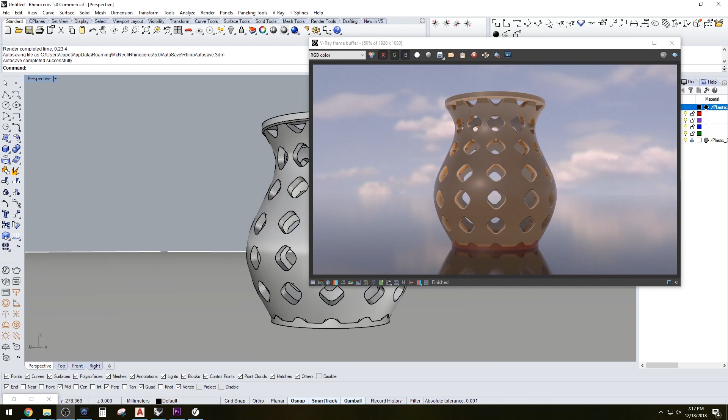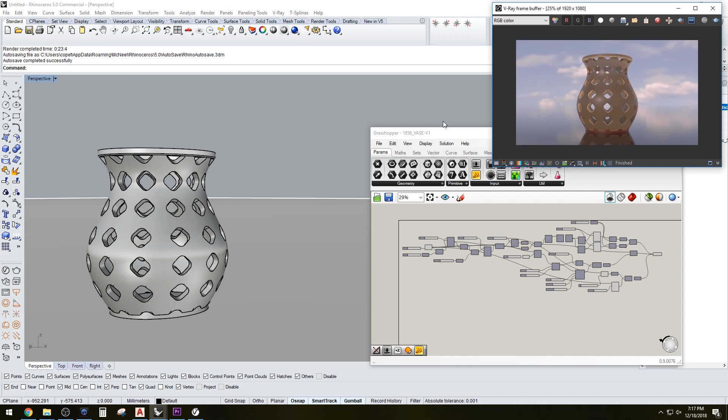Everyone, in this video I'll be going over the steps for creating a parametric vase form. I've been getting into 3D printing, so this is something I wanted to create to make some interesting shapes and then be able to produce them with the 3D printer. I'll be going over the process from the beginning initial design stage all the way down to the manufacturing and production of the design. Let me show you what it takes to get some of this done.

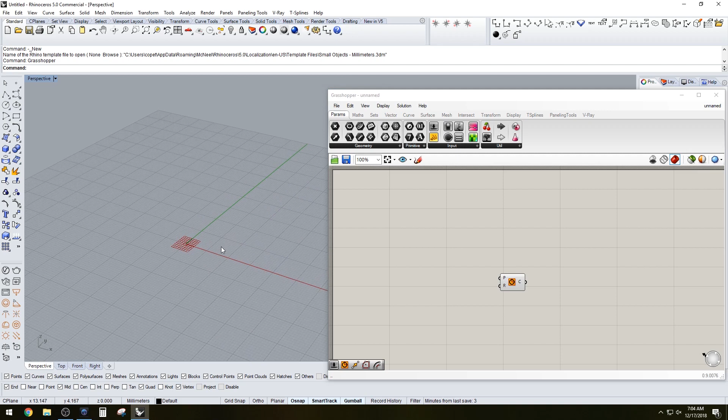To create this shape I was talking about, I'm going to open Grasshopper here and start with basic forms. I'm going to use a circle to create that shape, and I'm working in millimeters because that's the units that the 3D printer looks at. Let's go with a 50 millimeter radius here, and so we're creating the base geometry using a circle.

Now that we have the base circle, we want to create a form that kind of weaves in and out. So we're going to move this up. We have that initial shape, and we can move this up in the Z direction. We can go, let's say, another 50, the same amount, and so we have that shape and this shape.

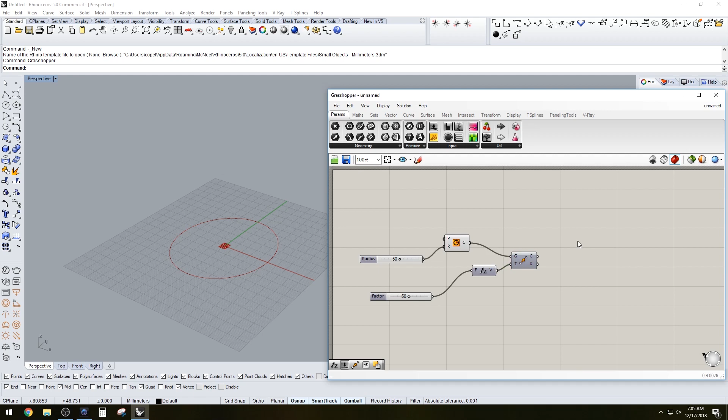Now I'm going to hide this shape because I want to offset that shape, out a certain amount, let's say 20, but I want it to offset out. The reason I do this is because I don't ever want the circle to go in, I only want it to go out. So I'll make it a max of let's say 30, so it'll only allow me to go out. That's what I want — that initial shape and the form that goes out.

Now we can move on and create another shape, which instead of creating separately, I'm going to take this circle and put a circle of the same size right above by mirroring this geometry and using this circle plane as the mirror plane. So we have that first, second, and third shape, which we could now loft together and create an interesting form.

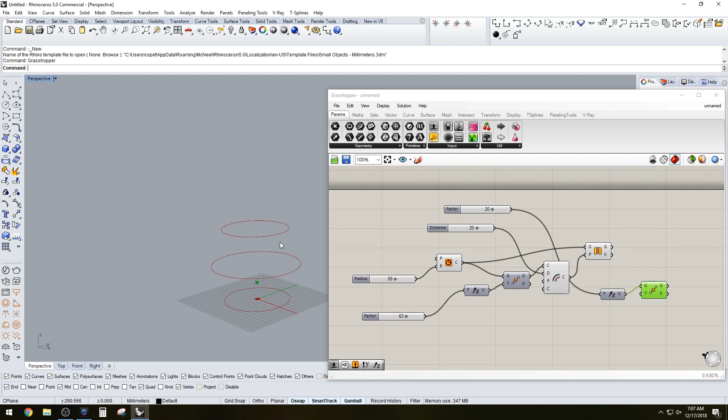But we want that top lip to be able to offset out also, so let me show you here. Let's offset this one, let's move that one up, move this shape up. So we can move that up a certain amount and then offset it out. We could also increase that height here, so we can go to 50 — we can increase or decrease, and then we can change that form.

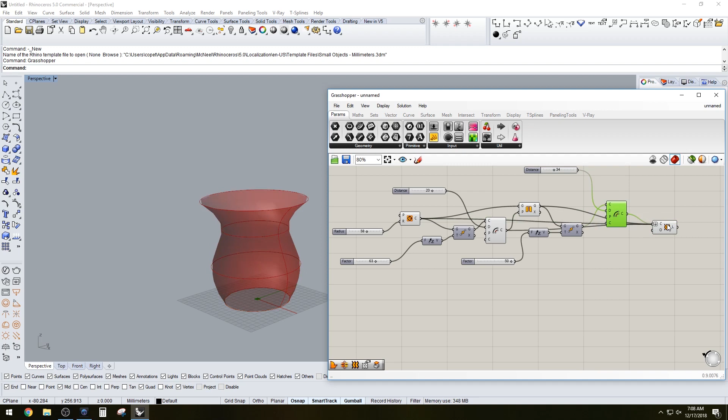We could easily loft this together, starting with the first one here, moving on to this one, flattening it. So that we have the initial form that we're going to use for creating the vase form. So there we have that. We can move this up and down and stretch the height there, and then also the offset of the middle.

Okay, so here we have the form. That's the final form, and we've created it by offsetting circles and using the circles as mirror planes. And so there we have the form.

Now what we want to do is create a solid offset for the surface, and we want to poke a bunch of holes through it so we can create an interesting form. So okay, let's get that done — offset it a certain amount, let's say 5 millimeters thick.

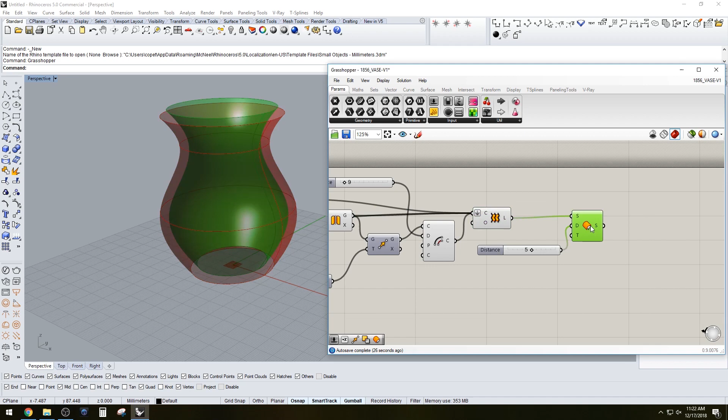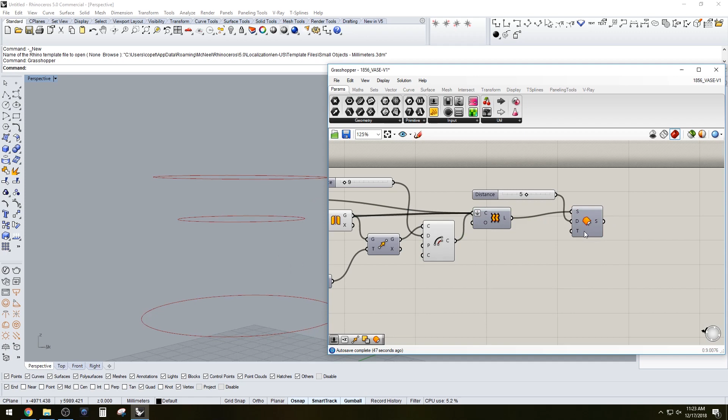So it starts offsetting to the inside. Now you could either try to offset in or offset out, either way. So we have that offset surface and we have that inner surface, and as you can see they are both — the one that is inside is off the ground, and then here it clips that one. So what we're going to do is hide both of these by unpreviewing them, and let's also hide all of this other initial stuff.

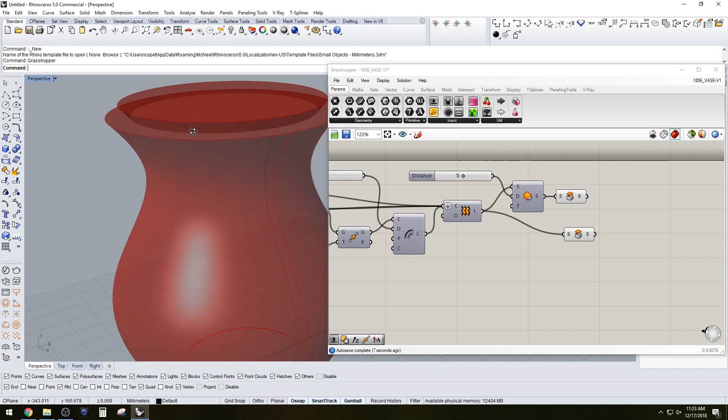And what we're going to do is cap them, both of them. So you go to cap holes, and you'll see here, when you do that, it creates the top and the bottom, and then you create that one into a solid. You have one inside of the other. Now let's go ahead and hide both of those, and we can see that this bottom one is the outside and the top one is the inside. So let's subtract.

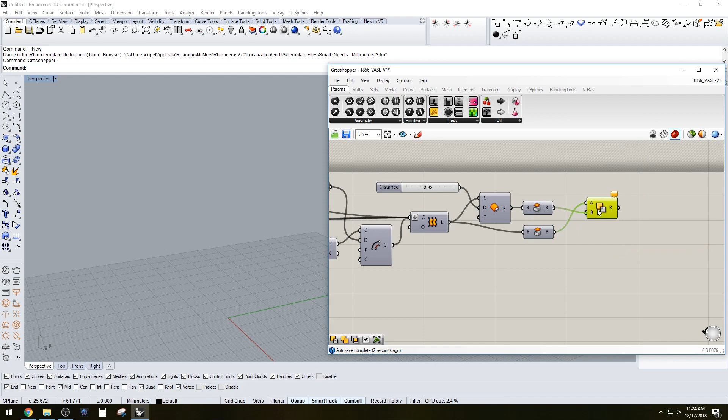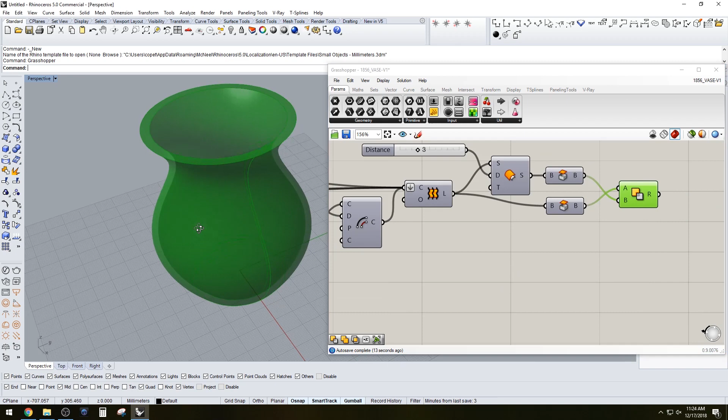So Boolean difference, which here is called subtract or solid subtraction, solid difference, and we know the bottom one is the outside one and this is going to be the inside one. And there we go, we have a vase, I guess, and that's the form we've successfully created, which we can straight 3D print right now because it's a solid. It has enough of an angle that it won't need supports. As you can see, we can adjust the height and the design of it here.

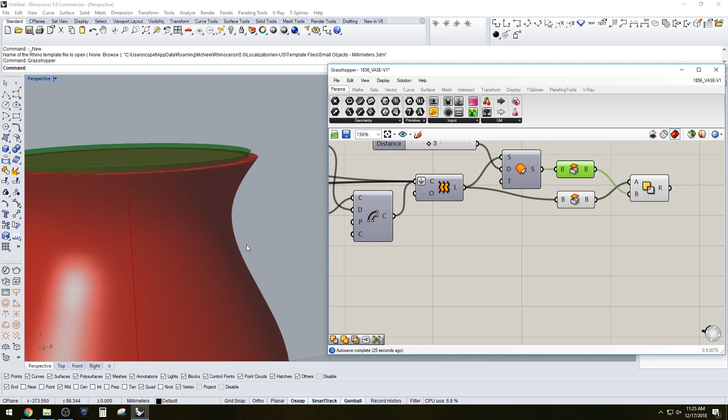Now what's interesting is that this form, since it's created on a surface where the lip goes out, that's why I offset out, because if you offset in, all of a sudden that inside form won't be outside, it'll actually be inside. So that's why you need this lip to be out, and that's what we have here. That lip can only go out, or it can only go in, and when it's in, you can see that it can still clip it.

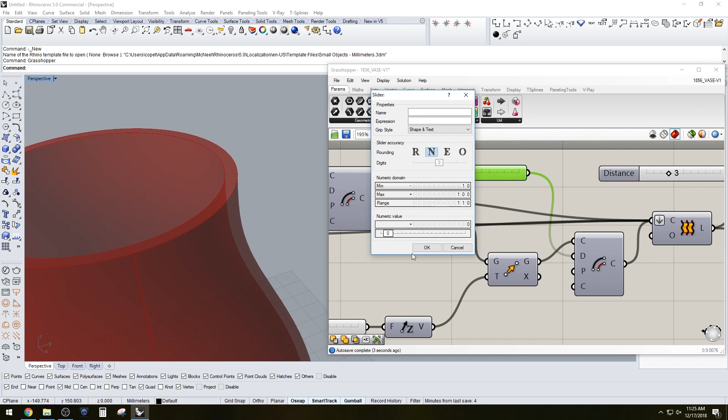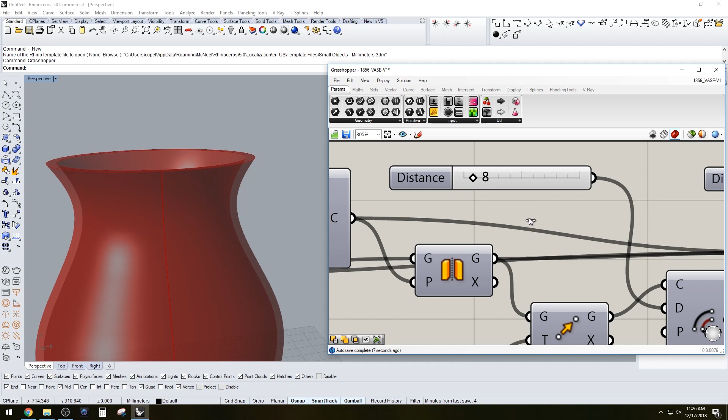But if we go the opposite, if we go negative, it won't work. See what I mean? It can only be offset out. So let's go to 0 here, and if we have it at 0, that surface is going to clip enough. So that is the reason why I use the circles and offset out, because this form in particular will allow you to offset out, cap it, and create that solid.

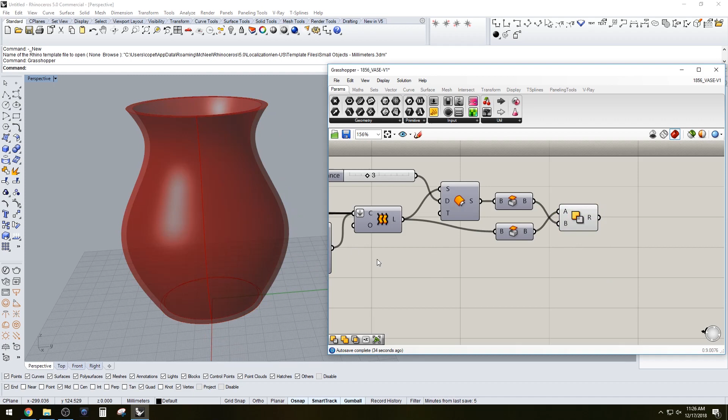Same with the bottom here. If we had the bottom circle, the bottom radius go out further, it would create a hole at the bottom. So there we have the form, and this is not just for creating a vase. It could also be used to create an architectural form, like a skin on a building.

Alright, so now that we have the form, I'm going to be doing a voiceover in this portion because I didn't record the audio before, but what you're going to want to do is basically subdivide the surface, because we do want to create some perforations like you saw at the beginning of the video.

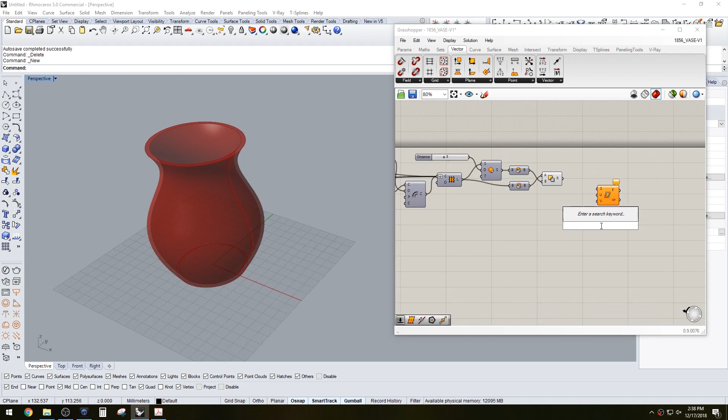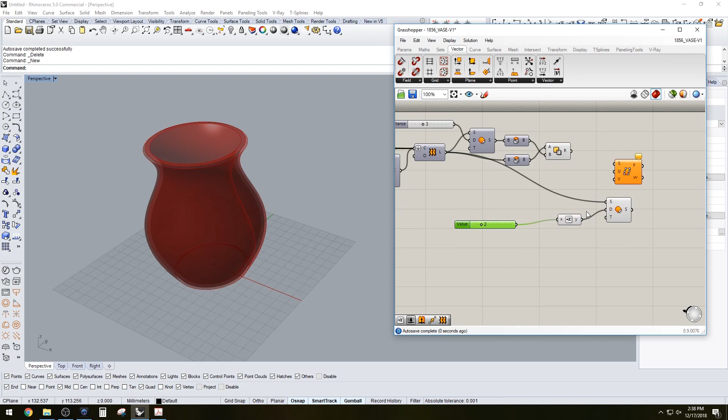The way that I wanted to do it was to offset the initial lofted surface, and by offsetting it and using it as a negative, you're able to offset out from that initial surface. So I was thinking of offsetting it out and offsetting it back in to use those surface frames and create the forms and then loft them together. But later on I decided to change my mind and do something different.

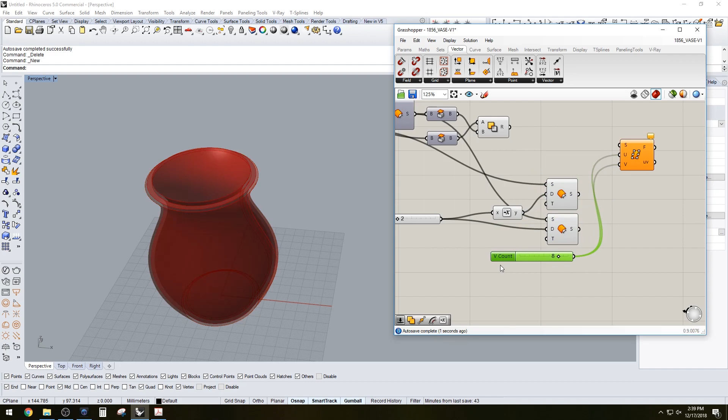So in the end, I'm not going to be using both of these surfaces. I'm only going to be using one of the surfaces and using those to extrude out of. As you can see, I used this component called surface frames, and you should be able to find it. What I do is I plug in those offsetted surfaces from the initial surface. I offset it out and then subdivided it using that surface frames component.

So what it does is it creates planes perpendicular to the surface, depending on the subdivision U and V.

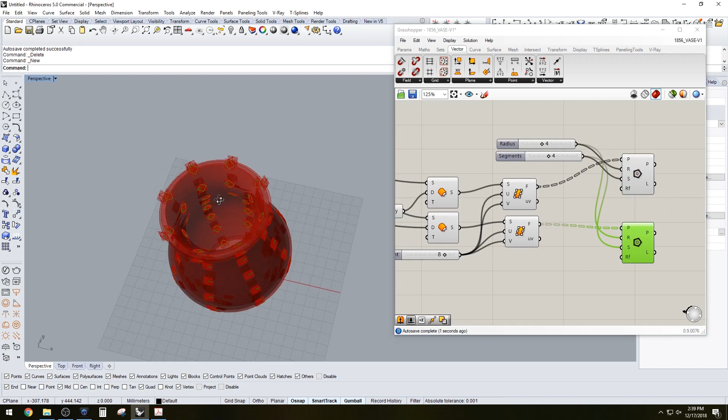Okay, so in this portion, I just hit that surface, and I was going to use those frames to create those polygons, and I was going to loft them together, but I wasn't able to. For some reason, when I took one set and put in the other set, I thought it would connect them. I tried flattening it, I tried grafting it, and it just didn't work.

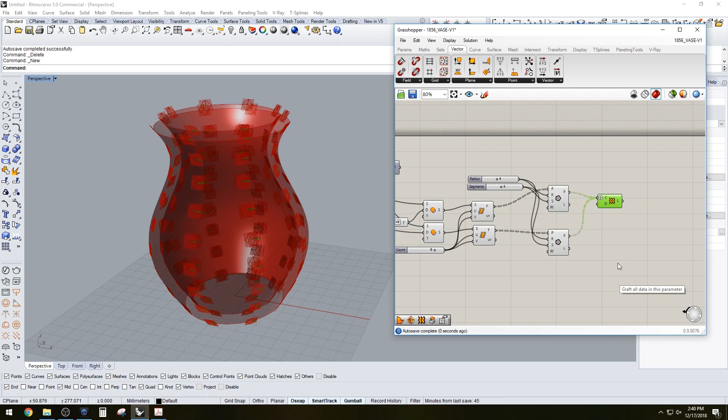So my next approach was to extrude one of those polygons, and I figured out a way to do it, which I hadn't used before, but it somehow seemed to work. So as you see here, I just tried so many different ways, all the different options.

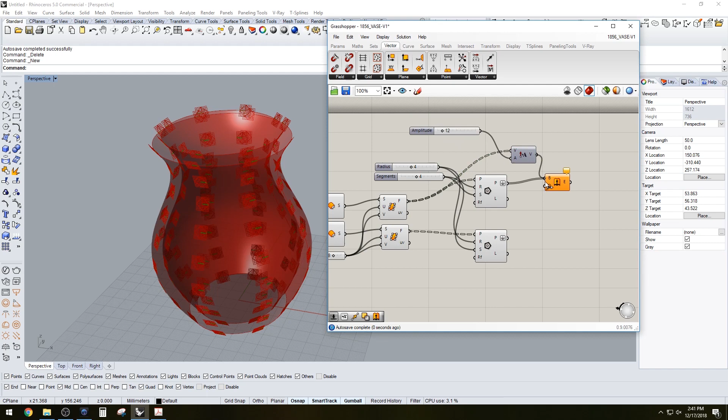So as you see, I gave up on that and decided to extrude one of the sets, then I used the amplitude and the frame, hoping that it would extrude in the same direction, and it didn't work until I flattened it, and somehow I was able to fix the issue, which now extrudes in the direction of each of those planes. As you can see, I'm only using one set of surfaces, not both of them. So I could delete that one, but I didn't at that point.

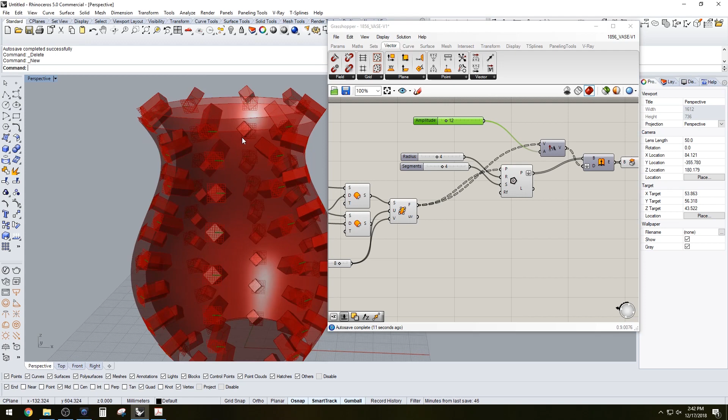As you can see, when you extrude something, you have to cap it if you're going to do a difference. So that was the approach that I took for creating the geometry around the shape, so then I could subtract it. And here I am cleaning it up a little bit and messing around with the different parameters I created for these other polygon shapes.

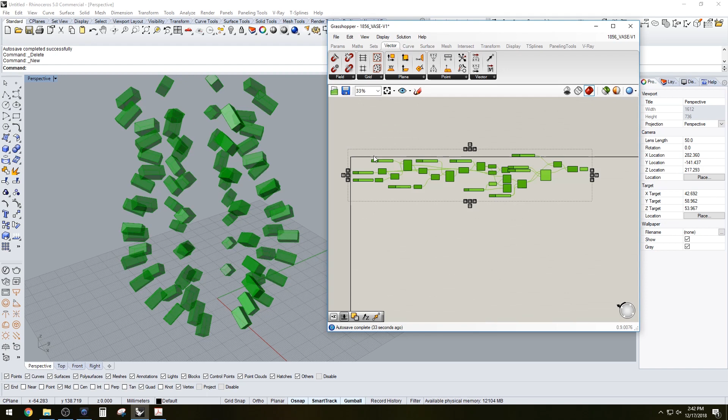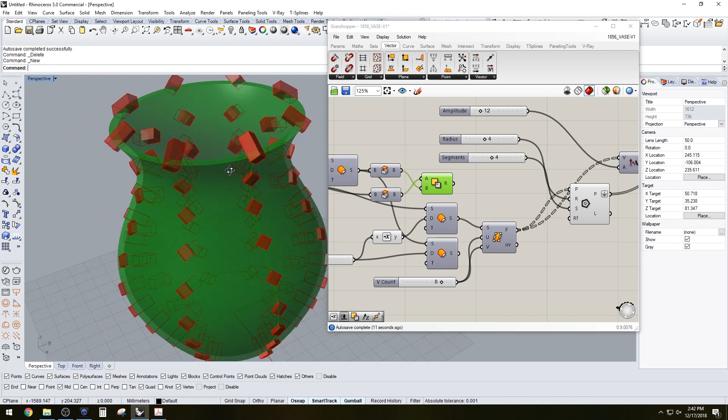And so there we have that solid, and those are going to be the perforations. And so here I'm going to just mess around with those parameters there.

And now I'm using a different slider for the V, just so I can get more divisions going the other way, and decrease the number of divisions in the vertical direction, which is U.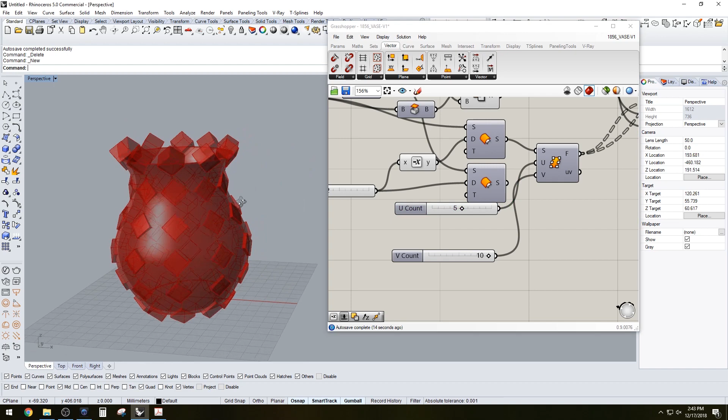Right now I'm using just a square, which when it's put kind of in a diamond position, but that could be changed into a triangle, a pentagon, a hexagon, octagon, and it's going to produce a different result every time. So that's what I think is useful about this tool - you can mess around with the geometry just by pulling a little slider, and come up with things that you wouldn't have come up with otherwise. It's just an interesting way of designing and producing interesting shapes.

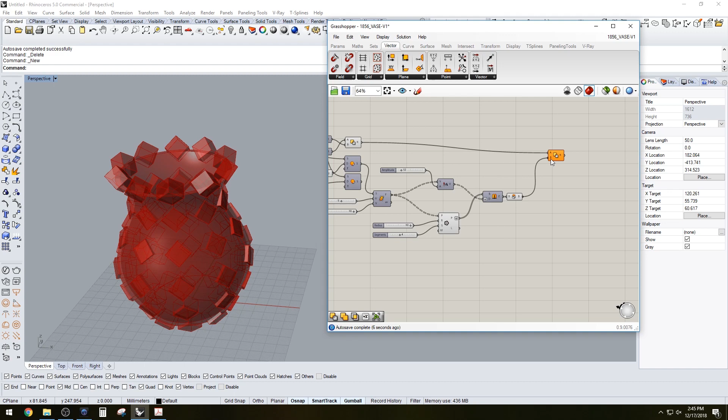Now at this point I'm just going to do the Boolean difference, so I'm going to subtract from that initial form those squares. And without even needing to flatten it or anything, it gave us a cool result.

Here I'm increasing the number of divisions, so it creates a more even pattern. But it's a bit heavy because you are subtracting a lot of objects.

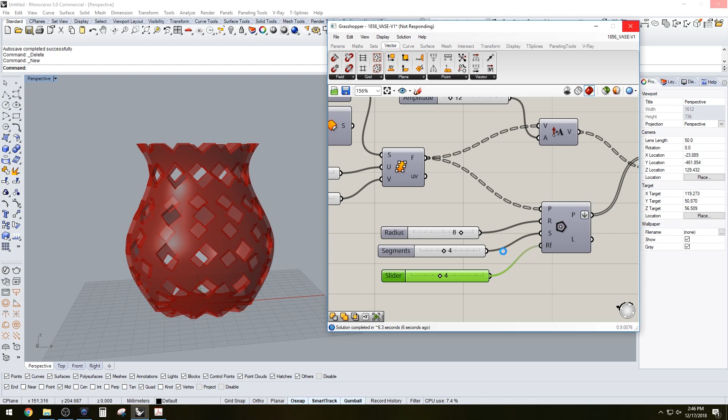And here we're decreasing the size so they don't clip all the way. And now I'm creating a fillet on the polygon, which actually creates an even nicer form, I think. So we can increase now the size of that polygon, and now we have an interesting form.

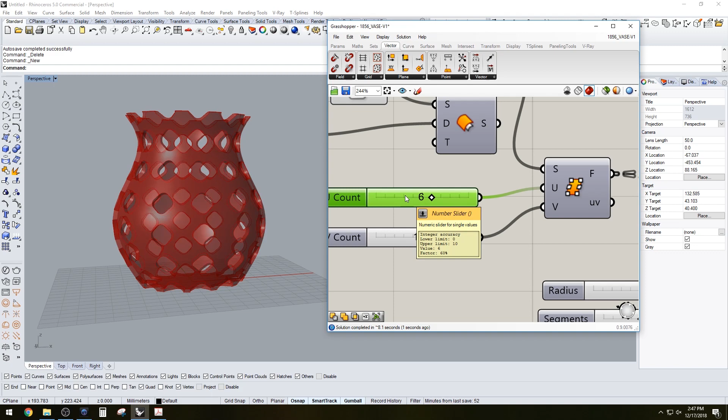I'm going to go ahead and also increase the number of divisions more in the vertical direction, and so now we have that.

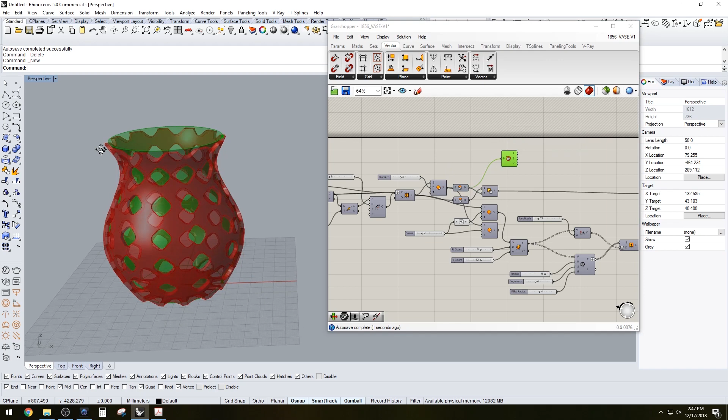Now since we have the basic form, I wanted to create a top ring, or a little lip at the top. And to be able to do that, we're going to have to extrude the top ring that we see there, and we're going to offset it and create that top lip.

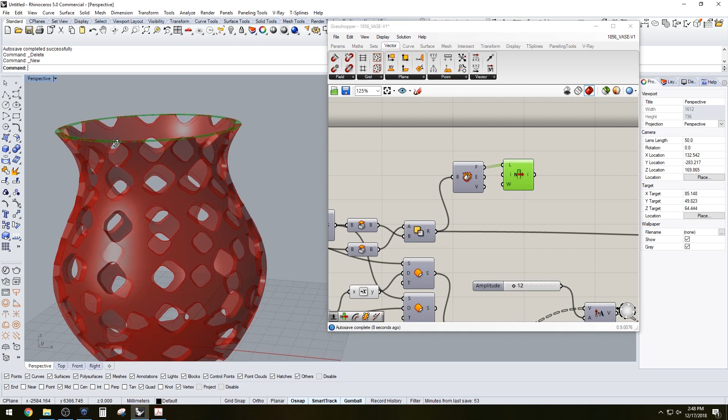So what I did was I deconstructed that solid that we had, and I chose one of the items from that shape, and the item that I chose was the top ring. So that ring I used the outside edges to offset out and create that top lip, as you see here.

So we have those edges that we chose, which are basically the two curves you see there. And so I'm offsetting both of those the same amount in and out.

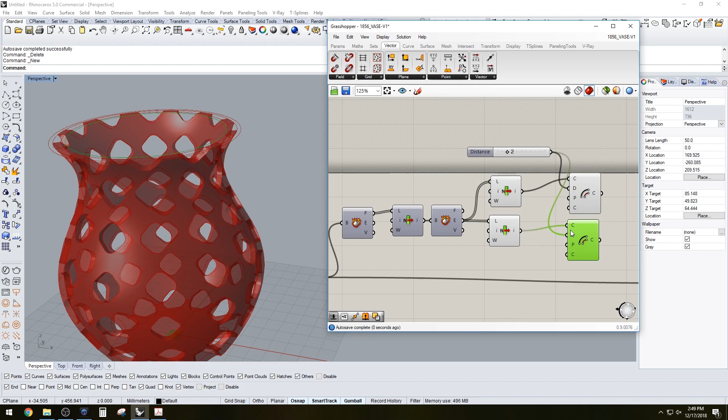At this point, what I usually do is I take those two curves and I extrude them, I cap them, and then I subtract them. The outside ring, or I subtract the inside ring from the outside ring to create a solid. So that's what I'm doing here.

I'm creating those steps before I even plug in the initial curves, because I've done this multiple times before, so I kind of skip some steps.

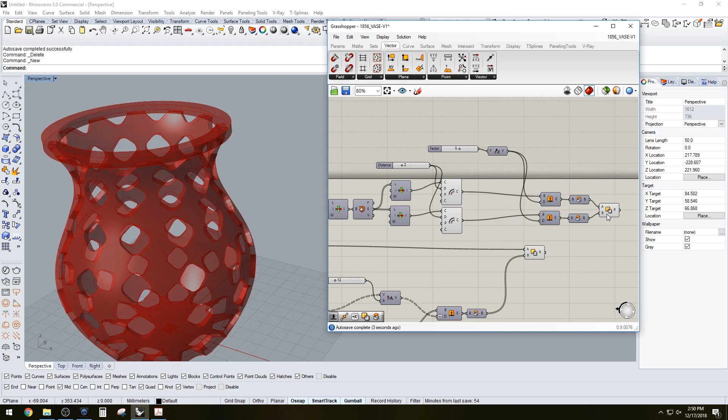So what you see is I'm extruding it a certain amount, which is in the Z direction, and we do the outside one, the inside one, and if we hide that, we have the resulting solid, which gives us the top ring, the bottom ring, or the bottom form.

Now we still have some holes at the bottom, which is not something that is ideal, or not something that I want. So I am going to go over the steps of how I created not just the top ring, but a base that blends in with the form.

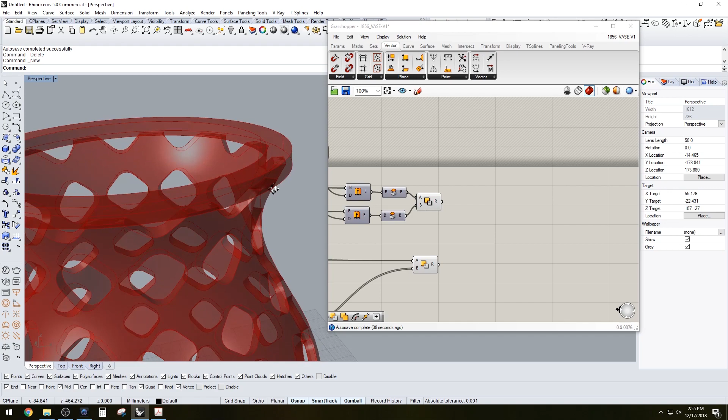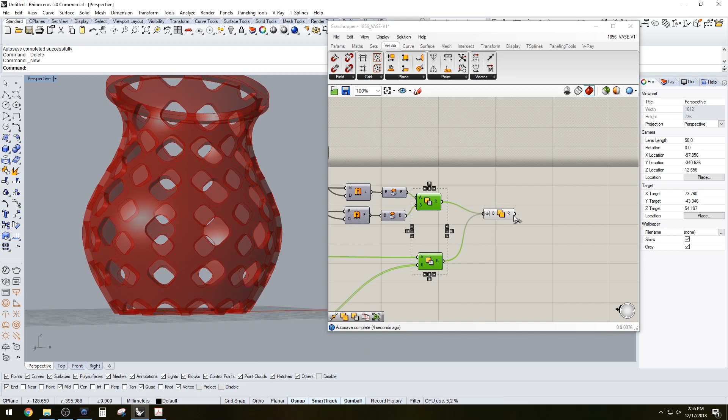And so at this point, since I'm going to be 3D printing it, it has to be a watertight solid. So I'm using a solid union, a Boolean union right here, flattening it just to have that whole thing completely solid.

So I'm going to deactivate it for now, and I'm just going to preview the two forms that we have.

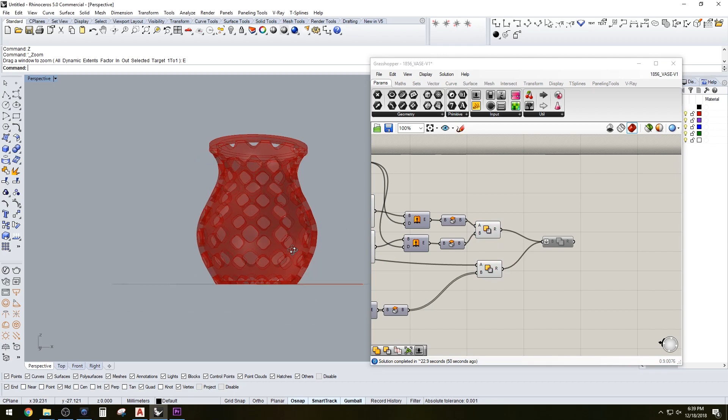So as you can see, we have that initial curve which started the whole thing, and that's what we want to extrude. The amount that we want to extrude it is the same amount as the thickness that we offset that surface. So whatever thickness we have, that's what I wanted to use.

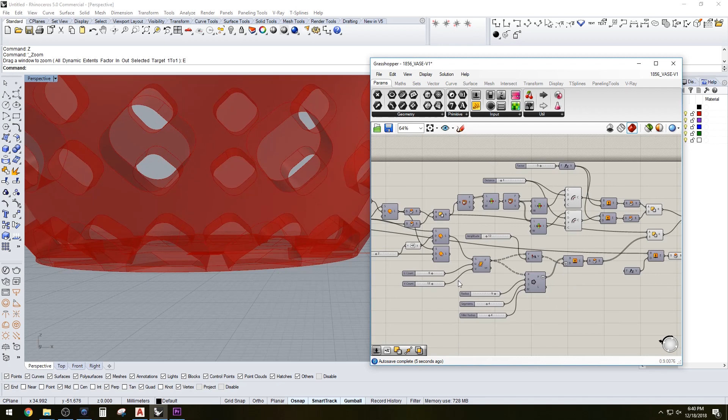So here I'm trying to look for it, and I think the offset—see, that's a surface I didn't need, so I deleted it there. But what I'm looking for is that number for the bottom. Sometimes it takes me a while to trace back things if I don't label them right away.

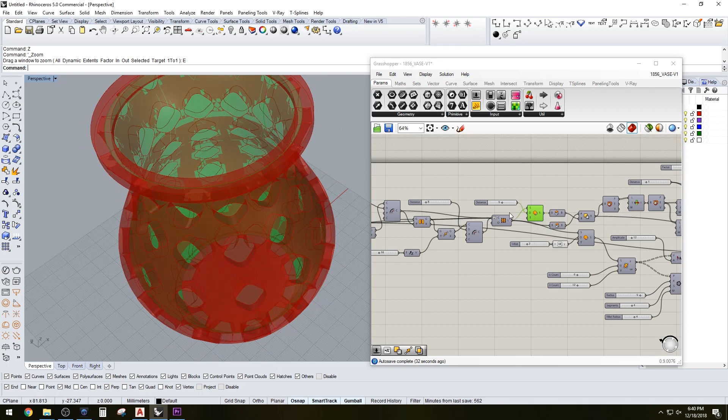So there, I found it. It's a 5, and I plug it into there, so whenever I change the thickness, it'll give me that same amount at the bottom.

But as you can see, I still have the holes there. It doesn't fully enclose the bottom. So I'm also taking that initial circle and offsetting it out.

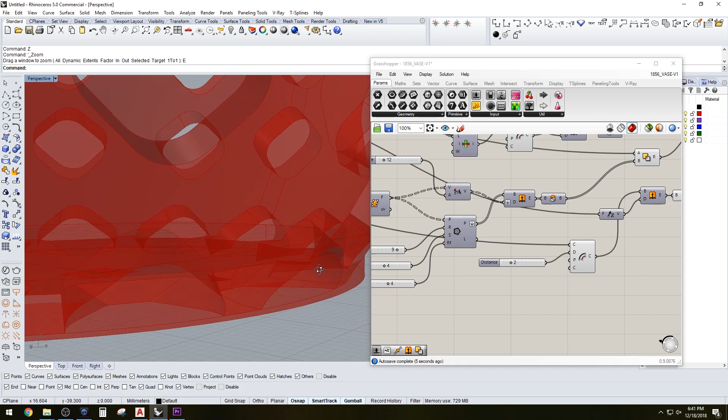This was a little bit too much, but I'm offsetting it out and plugging it back into that extrusion that I had there. That way I can control if I want the base to be a little bit wider than the bottom, and since I'm going to be putting it all together, it's not going to matter right now if it intersects the other part.

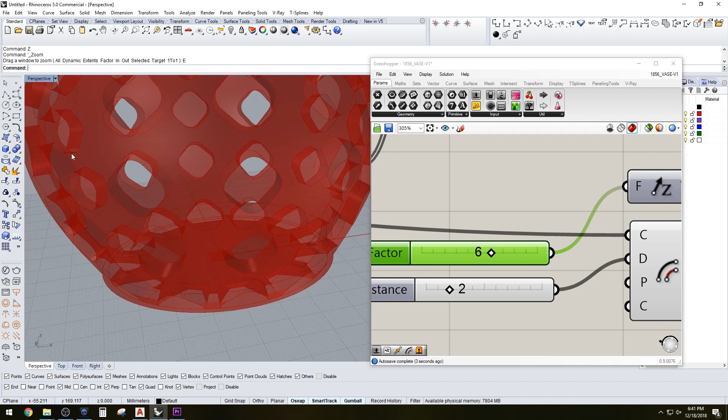So I have it offsetting out too, but I want to be able to increase the base depending on if I want to add more to the thickness. I thought I could just have an independent slider for that, but a better decision was to add the initial thickness plus a specific number, which I will show, and that be the way I can control the bottom part of the geometry.

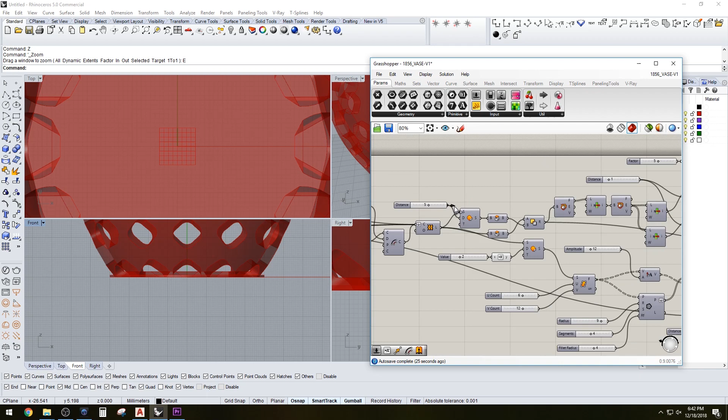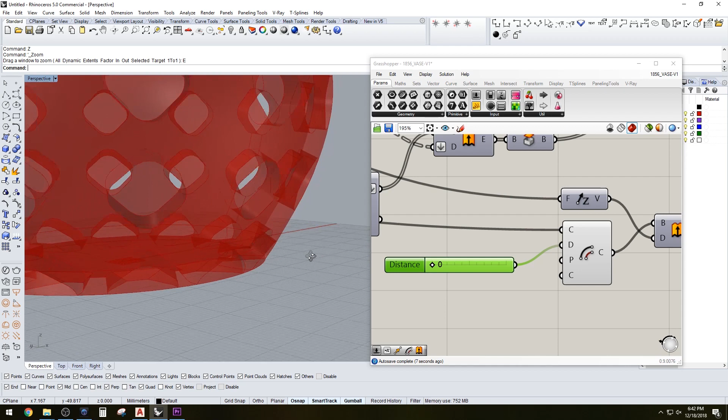So I went back to the 5 there. And no, it's still not working. I'm trying to see if by not offsetting it works. But now I'm gonna go ahead and do the...

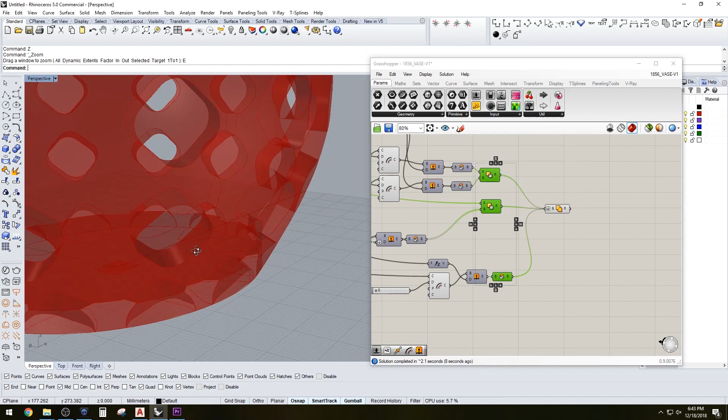See, now I'm putting it all together and it still has a hole at the bottom, which is not something I want. I just want to make sure that the bottom has a complete solid, even though it has perforations on the outside.

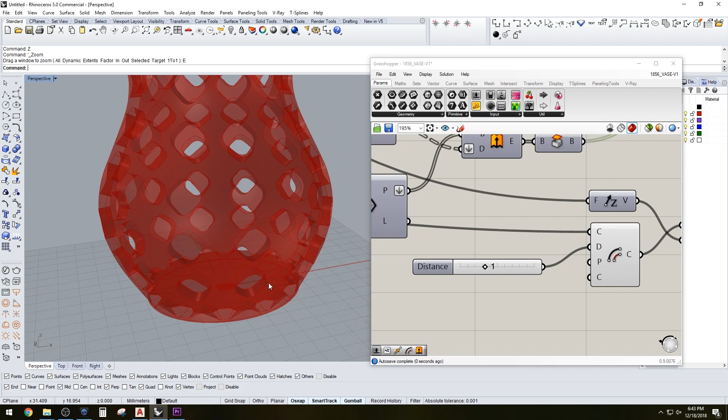Just in case you put a pencil there or something, I don't want it to slip out, so I'm offsetting it out more to see if it helps. And it still has a hole at the bottom.

So now I'm gonna plug that in there, and I'm gonna add that initial 5 thickness that we have for the walls. I'm gonna copy that slider, and add a certain amount to that too. So whatever that was, it adds 1.

And it is a bit heavy, like I said, because we're working with the solid and doing a lot of different calculations at the same time. And so now it's completely enclosed, and this is what I was looking for.

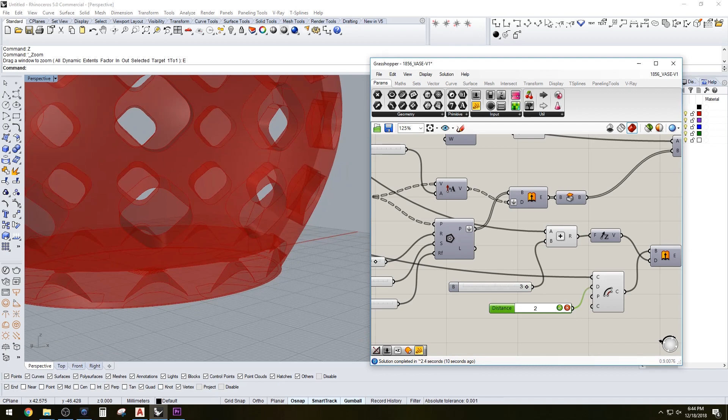So this should be a good enough form to 3D print. We've successfully created that. I will make sure to clean up and have all of this organized for you to download and mess around with.

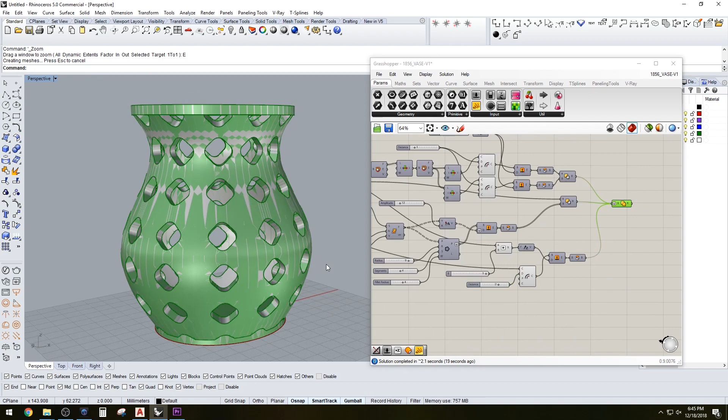I'm sorry this was kind of a longer and a little bit more boring than normal, but sometimes when I do a voiceover I forget exactly the steps I took for creating it, so watching it and doing the voiceover at the same time is a bit tricky. I apologize for some of those mess-ups.

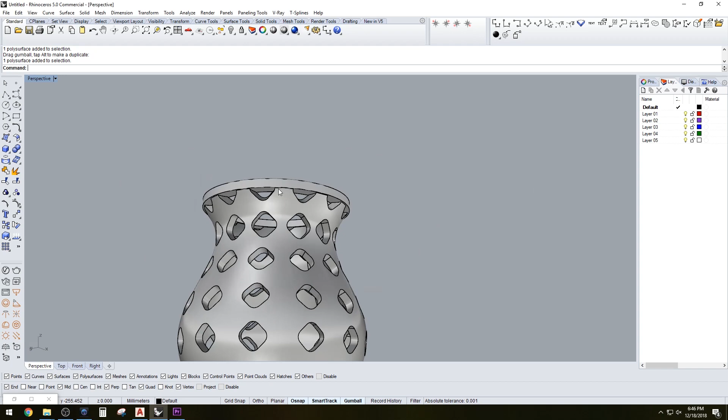But as you can see, we have that form, and I'm pretty happy with it. I know I could do a lot more forms, but I just stuck with this initial one that I made. I mean, I could have varied them a lot.

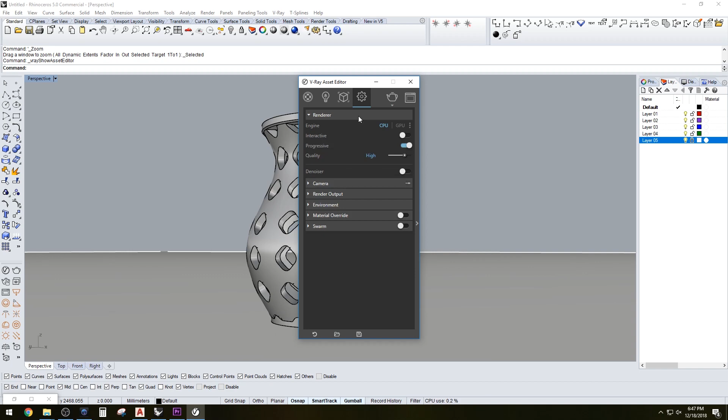So maybe in another video I'll create all the variations you can make on something like this, but for now I just created a rendering scene, doing it as a time lapse, showing you. I just used some random pre-made colors, put a sky and a shiny ground, and got a pretty interesting result in the end.

So I hope you enjoyed the tutorial and learned something, because I sure didn't know some of these things, and somehow they worked out. Hopefully it inspires you to do some more parametric design, because it's a lot of fun, and I feel like it's such an interesting way of designing that I'm pretty much obsessed with it. Thank you very much for watching, and stay tuned for more videos.